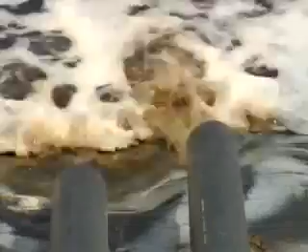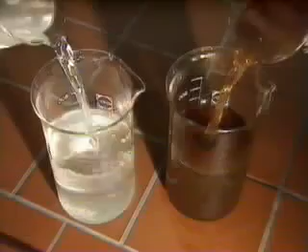Salt water and contaminated water have one thing in common: both are solutions made up of molecules, salts and other solutes of differing origins. Consequently, desalination technology can be used to purify leachate from landfills, as long as the problems specific to wastewater are overcome.

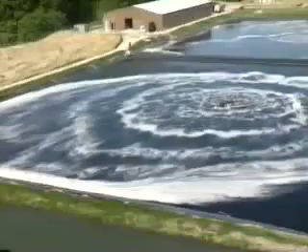The problem sounds quite simple: how can pure water be separated from seawater or leachate?

There is a law of nature which, at first glance, would seem to achieve exactly the opposite result of what we want. This law, known as osmosis, is a natural process which controls the water household in the cells of every living creature.

Let's have a look at this model of what goes on. Theoretically, we can say that two solutions of differing concentrations, separated by a membrane, will try to equalize the difference in their concentrations. Both the smaller water molecules and the large solute molecules would diffuse unhindered through the membrane.

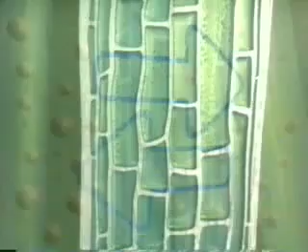But a cell membrane is in fact semi-permeable, and so only molecules of up to a certain size can diffuse through.

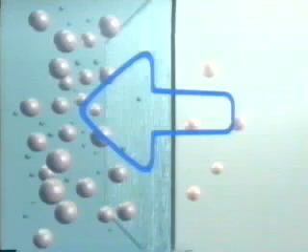In the attempt to balance out the difference in concentration, the more concentrated solution will suck in the smaller water molecules from the less concentrated solution, with the larger solute molecules being held back by the membrane. The more concentrated a solution is, the greater the osmotic pressure.

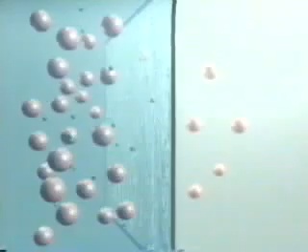If we subject the concentrated solution to very high pressure, the small water molecules flow through the membrane and out of the concentrated solution. In this way, the natural process of osmosis is reversed, and thus can be used to desalinate or purify water. The term given to this is reverse osmosis.

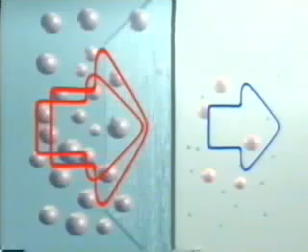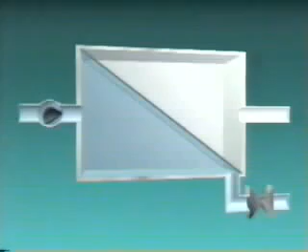When reverse osmosis is used for industrial applications, salty or dirty water is pumped into a separating device known as a module. A high-pressure pump ensures the required operating pressure of 60 bar is maintained.

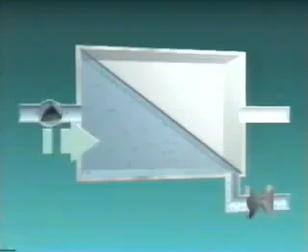The semi-permeable membranes only let the pure water molecules pass through, and they are then channeled off in the permeate stream. The liquid left behind becomes more concentrated as the proportion of solutes increases, and is then pumped away in the concentrate stream. The osmotic pressure of the untreated water determines the yield of pure water, the so-called recovery rate.

For example, you only obtain approximately 30% permeate from seawater, which has an osmotic pressure of around 25 bar, but the permeate yield from landfill leachate, with an osmotic pressure of between 5 and 15 bar, is about 70 to 80%.

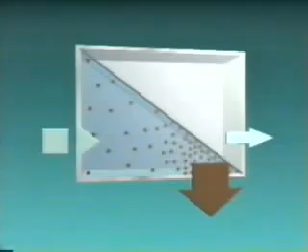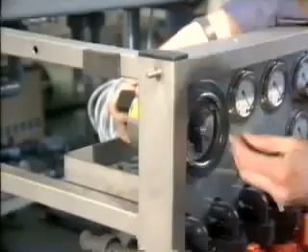The reverse osmosis system developed by Rochem is based on precisely this principle. Rochem plants have been successfully supplying drinking water by desalination since the early 1980s. By the end of 1992, more than 700 plants were in operation all over the world. Its customers include merchant shipping lines, navies, and companies in the offshore industry.

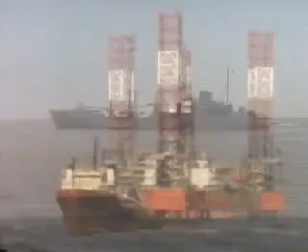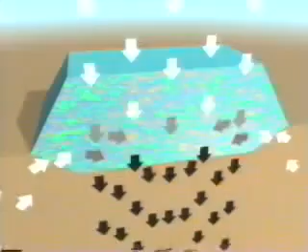Now, however, this reverse osmosis technology is being increasingly used to purify landfill leachate. Rainwater, spring water and groundwater flowing in from the surrounding soil penetrate the body of waste in the landfill and become contaminated. The leachate produced in this way is usually polluted with neutral salts, ammonium, adsorbable organically bonded halogens,

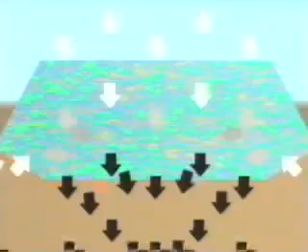oxygen-depleting substances and other harmful substances such as heavy metals, lead, mercury and the like. By using reverse osmosis technology, we can even purify this kind of highly polluted wastewater and return it pollutant-free to the water cycle.

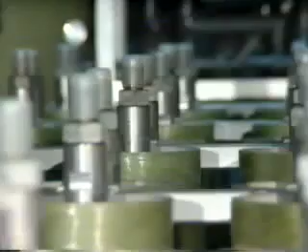Rochem's disc tube membrane module has been used to this end with great success since 1988. The concept behind this modular system is partly based on work carried out at the GKSS Research Center at Geesthacht near Hamburg. The system itself is the result of many years of research and development carried out at Rochem.

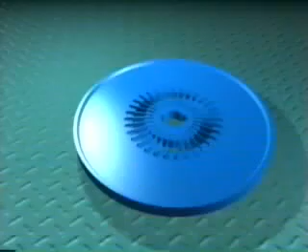At the heart of this leachate purification plant is a patented disc tube, or DT module. It is made up of hydraulic discs and octagonal-shaped cushion membranes. Once the module has been assembled, O-rings on the hydraulic discs ensure a leak-proof seal between the high and low-pressure sides of the system.

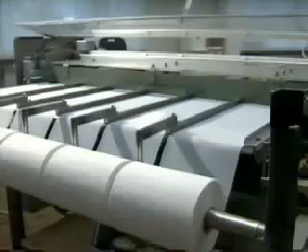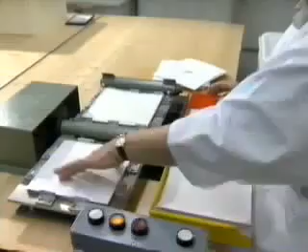Rochem has largely automated production of these cushion membranes. The membrane material is manufactured in rolls from which the flat membrane pieces are cut out. Two of these pieces with a drainage fleece in the middle form the basis of each cushion membrane. They are bonded together by machine and a hole is then punched in the middle.

The three components of a flat membrane are a mere 0.1 of a millimeter thick. The actual separating medium, though, is only 2,500 angstrom, or 1/4000th of a millimeter thick, so it is mounted on a carrier medium and a porous supporting fleece to give it the necessary stability.

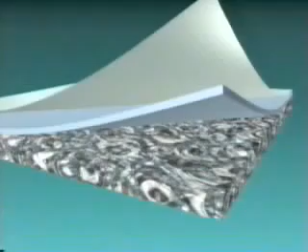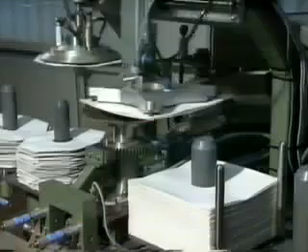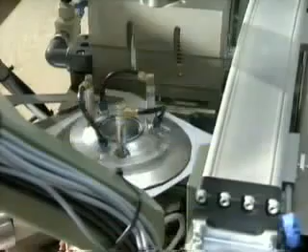Ultrasonic robots then bond together the membrane and the drainage fleece, and any protruding edges are trimmed off. Constant controls and careful monitoring of the production process ensure high product quality.

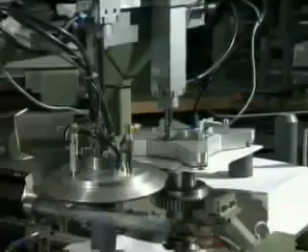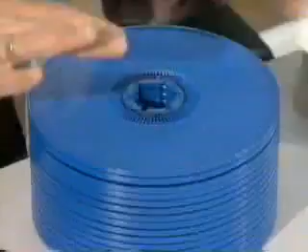Once the O-rings have been mounted by hand, 170 hydraulic discs and 169 cushion membranes are fitted, one after the other, onto a tie rod to form a standardized stack of membranes about a meter high. The total surface area of the 169 cushion membranes is 7.6 square meters.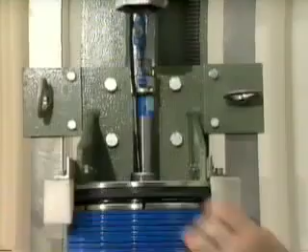After the end plate has been attached and the nuts tightened, the module is completed by inserting it into a tube which serves as a pressurized cylinder for the stack of membranes.

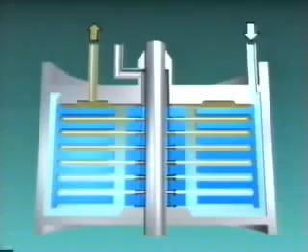Pumped into the module at great pressure, the untreated feed water is forced between the pressurized tube and the stack of membranes to the end disc. From there it flows through the various open channels composed of hydraulic discs and cushion membranes.

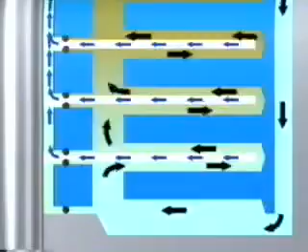The arrangement of the hydraulic discs ensures a controlled flow of untreated feed water. It is pumped through the open channels across the surfaces of the membranes. This cross-flow method ensures that the solutes are not deposited on the membrane surfaces even though their concentration increases along the flow path. What's more, the open channel allows for highly efficient cleaning.

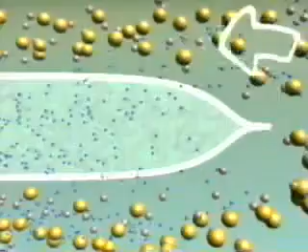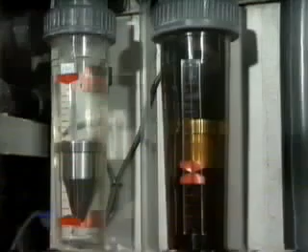The permeate obtained by this process is of drinking water quality when the process is applied to desalinate seawater. If reverse osmosis technology is used to purify landfill leachate, the permeate can immediately be returned to the water cycle. But the leachate purification process concentrates these pollutants and substances that are harmful to pure water and the environment.

Thermal processes, such as evaporation and subsequent drying, are normally used to concentrate these substances before disposal. But here too, Rochem has developed alternative solutions that greatly reduce energy requirements.

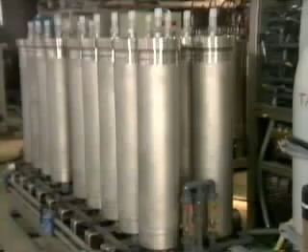In order to increase the yield of dischargeable permeate even further, Rochem has introduced an extra step into the reverse osmosis process: high-pressure reverse osmosis. At a greatly increased pressure of between 120 and 150 bar, the concentrate stream is again forced across semi-permeable membranes in a special DT module, with the result that more pure water is extracted from the concentrate.

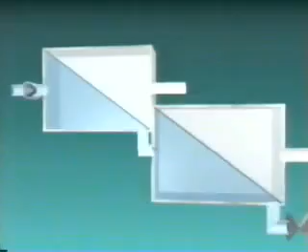Consequently, there is a considerable reduction in the amount of concentrate remaining. Thus, the permeate recovery rate can be increased to over 90%.

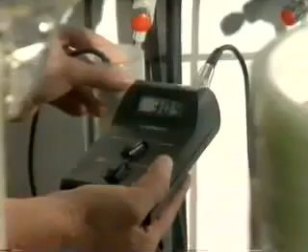Rochem has introduced standardized testing conditions to ensure that every module is subjected to a comprehensive functional inspection. Only after passing this test does it receive its inspection number and can leave the factory.

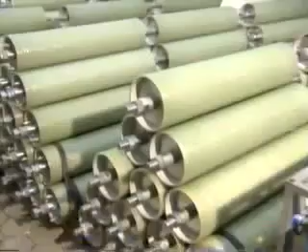The successful large-scale application of Rochem's reverse osmosis leachate purification technology began in mid-1988 at a waste disposal plant in Schwabach, a town in southern Germany. Rochem also supplied what is still the world's largest leachate purifying system to Ihlenberg landfill near Selmsdorf in northeast Germany. It went into operation on December the 15th, 1989.

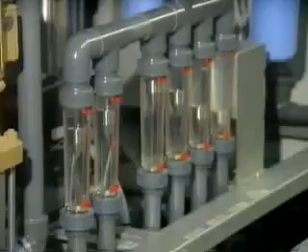In addition to many other sites in Germany, leachate purification plants of various sizes have also been delivered to Austria, the United Kingdom, Ireland, France, Italy, Switzerland and the USA.

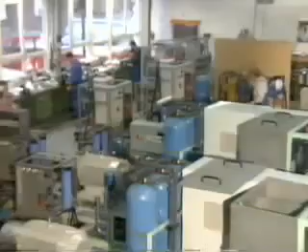Rochem has faced up to the challenges presented by increasingly grave environmental problems. One result has been innovative advances in the technology for purifying contaminated water. Over 50% of the reverse osmosis plants operating around the world for leachate purification were built by Rochem. This company, with its DT module and leachate purification technology, is a world leader in this sector.

So, as you can see, Rochem is making an active contribution to the solution of pressing environmental problems to protect future generations.